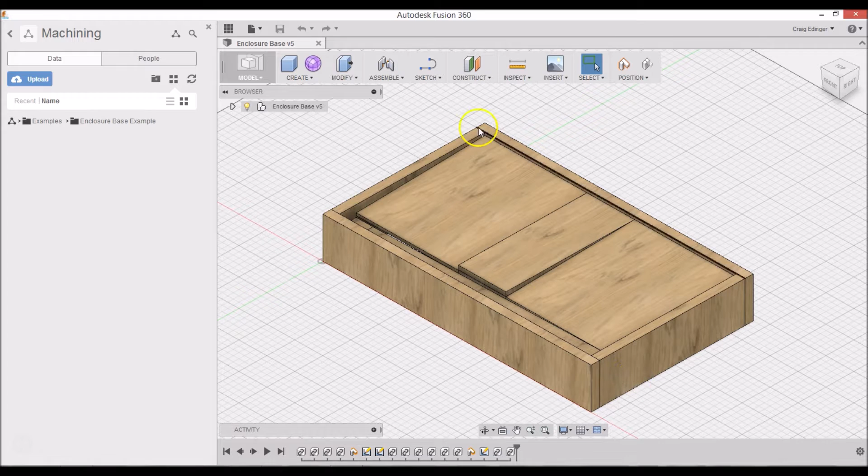Hi, in this video I'll be covering the design of my mini mill enclosure, the base portion of it. It's going to be set up for flood coolant, so that's why these are sloped here, and there's going to be a drain right here. The basic construction is 2 by 8, with a couple of 2 by 6s holding this up, with plywood here.

Once the framing is all done, I will be covering the top with fiberglass. Okay, so the first thing I'm going to do is create a new design, and save it. I'm going to call this base, enter.

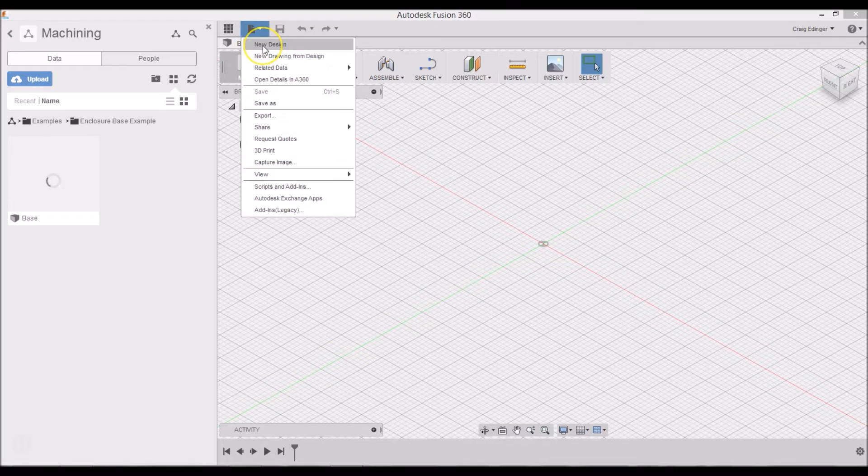And then I'm going to create a new design and save this as 2 by 8 by 48. Hit enter.

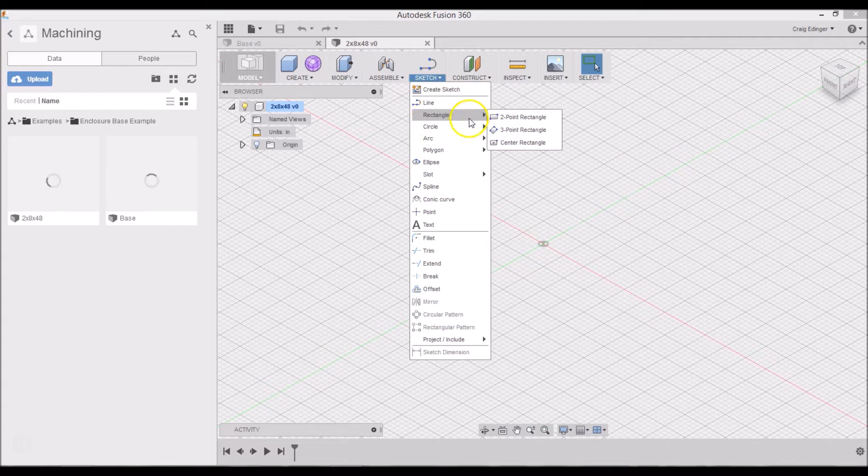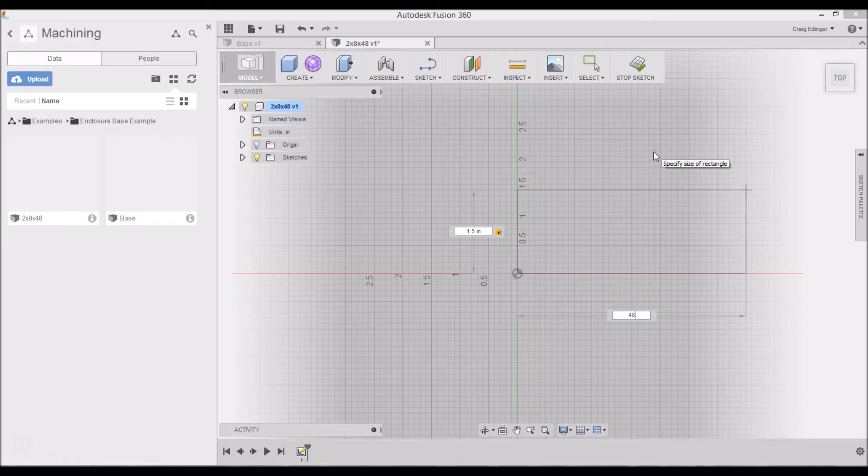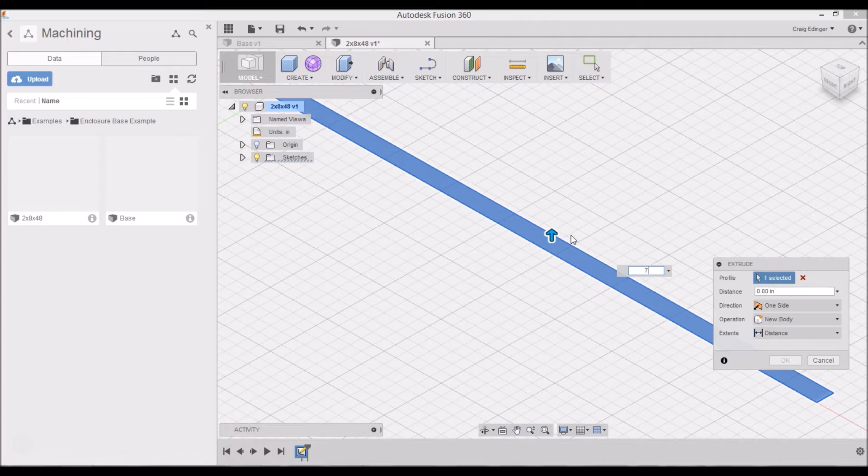Then I'm going to go to Sketch, Rectangle, 2-point rectangle. I'll go to the top, select that plane, and select the zeros. I'm going to make this 1.5 inches, tab, and say 48. Enter, enter. Then go to the home position, right click, press pull, select here, and 2 by 8 is actually 1.5 by 7.5, so I'll put in 7.5 and hit enter, then zoom out.

And then I will go to Modify, Physical Material, bring this out. I'll go down to Wood, and take the regular wood and just drag it onto here. And then close this up. Actually, I'll right click and cancel.

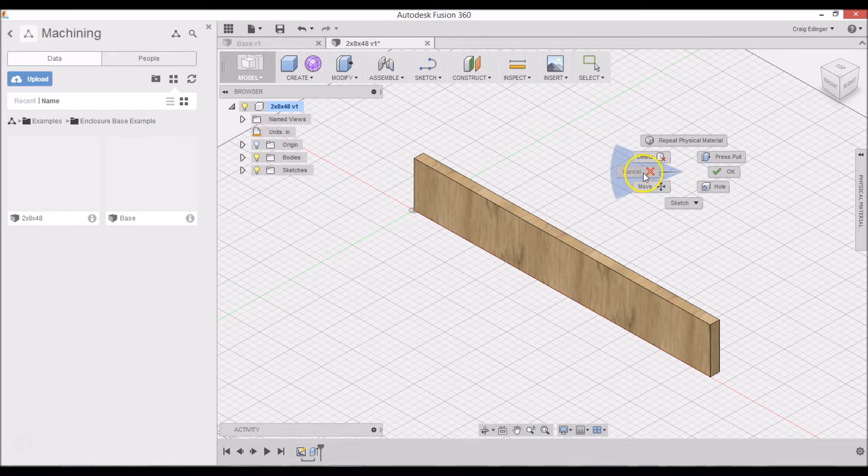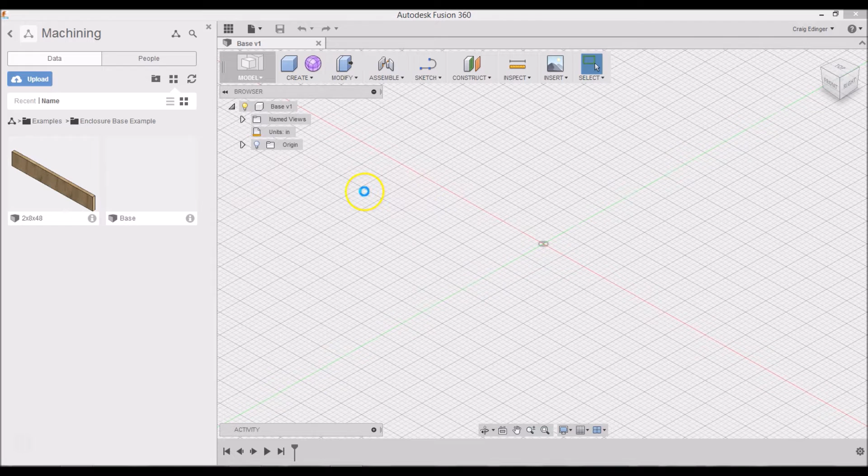Okay, well, that's the first piece. I will save this. And I will then close this. And I will drag that in here. And it's in the right location, so I'll hit enter. Okay, so I now have the first piece there.

And the next thing I'm going to do is make the piece of wood that goes across this way. So I will create a new file, new design, and save this as 2 by 8 by 26. Hit enter.

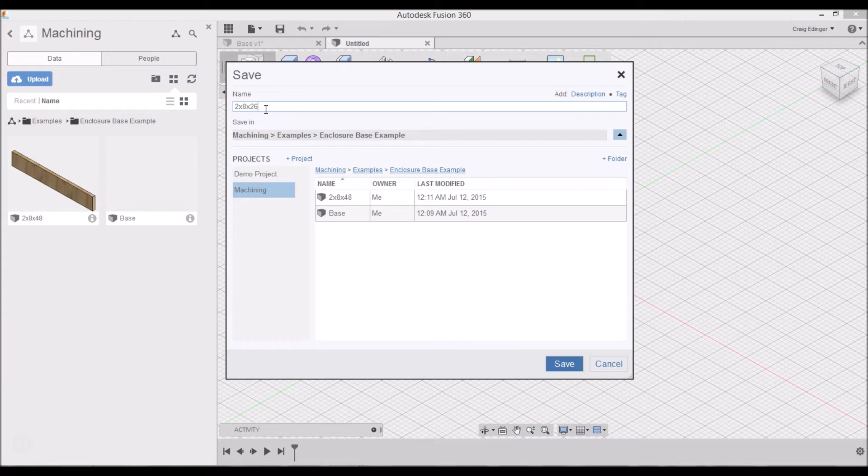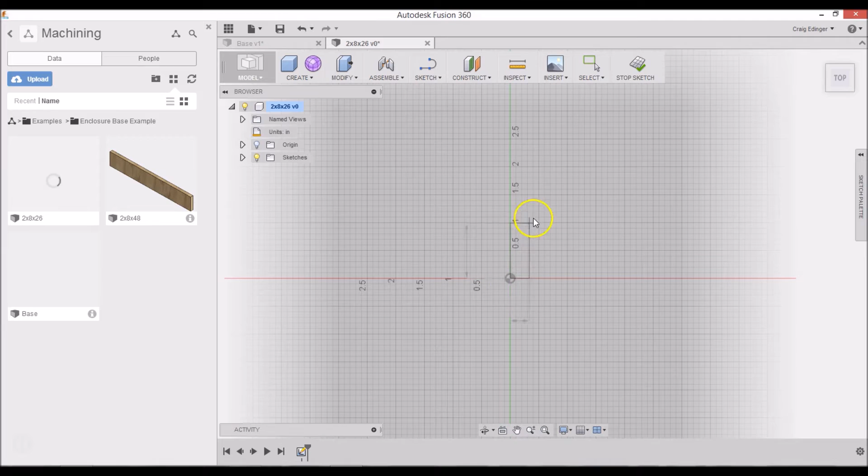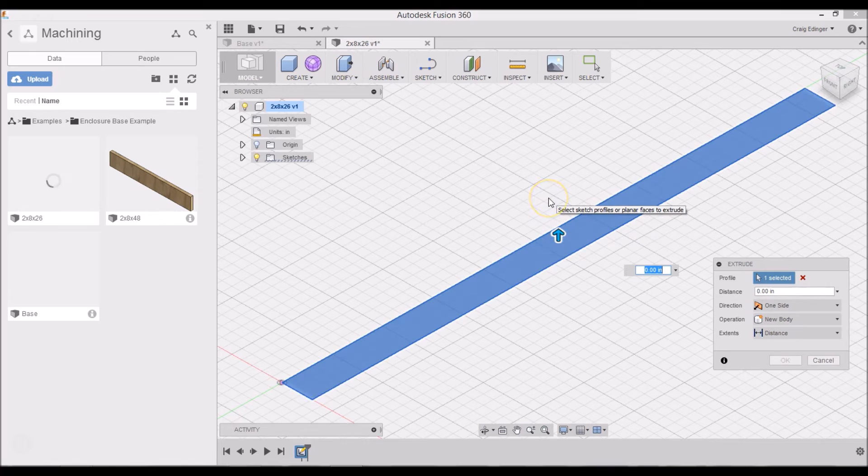And I will draw this in the orientation that it's going to go in, so I don't have to worry about rotating it. So I'll go to Sketch, Rectangle, 2-point. I'll go to Top View, select the plane, and go 1.5, tab, and 26. Enter, enter. Then go to Home View, right click, press pull, select that, and this also will be 7.5, hit enter.

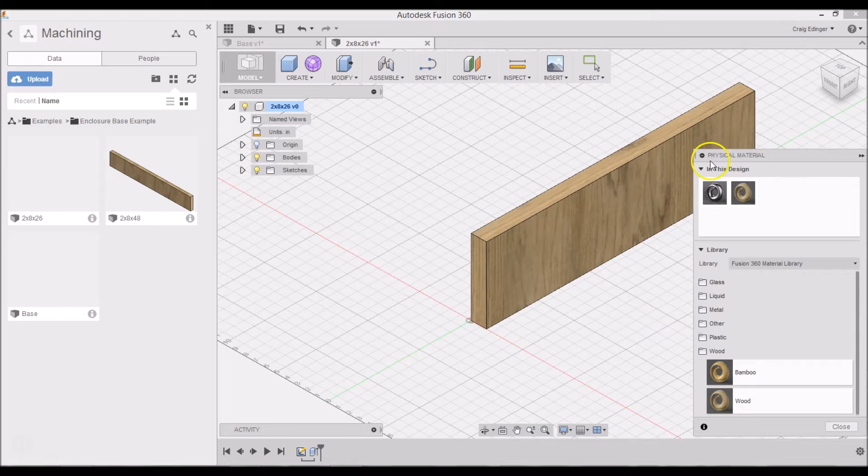Zoom out, again modify, physical material, and then drag wood onto there. And close that up, and File, Save. And I'll go ahead and close that. Wait for that to save.

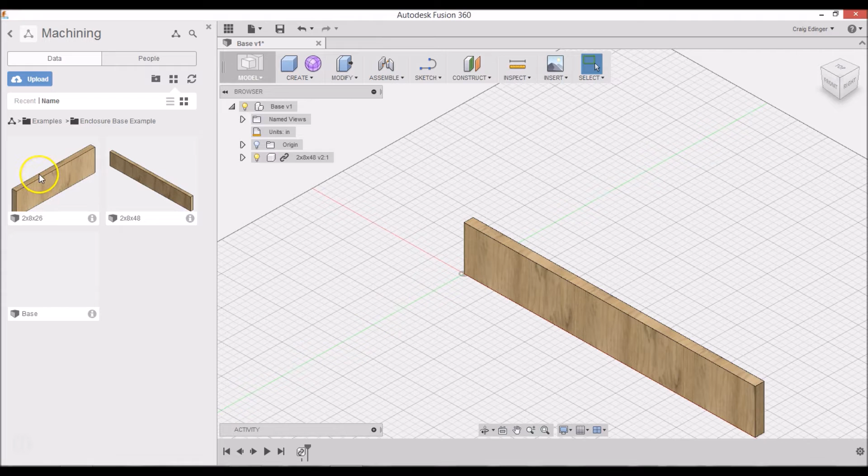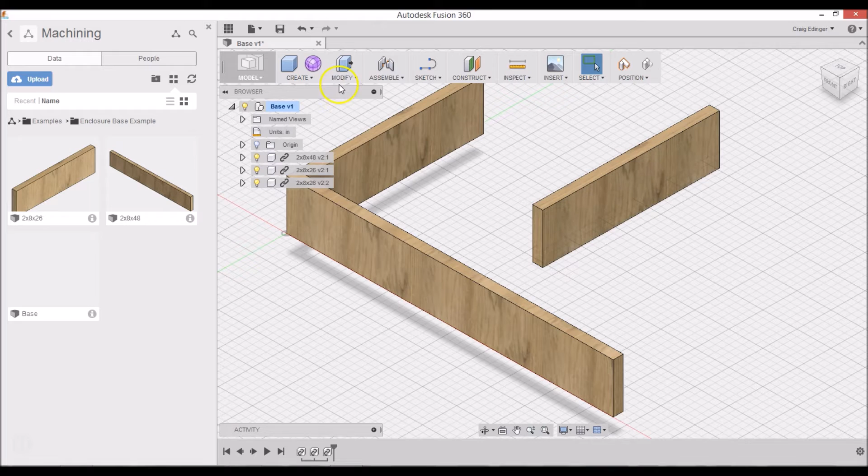I will then take this piece and drag it in, and pull it out a little bit so I can work with it. I will then go to Modify, Align, and select this point and this point, and click OK. And I will pull another one of these in, and pull it out here, hit Enter, and do the same thing, Modify, Align, except this time I'll get this corner and align that with right here, and click OK.

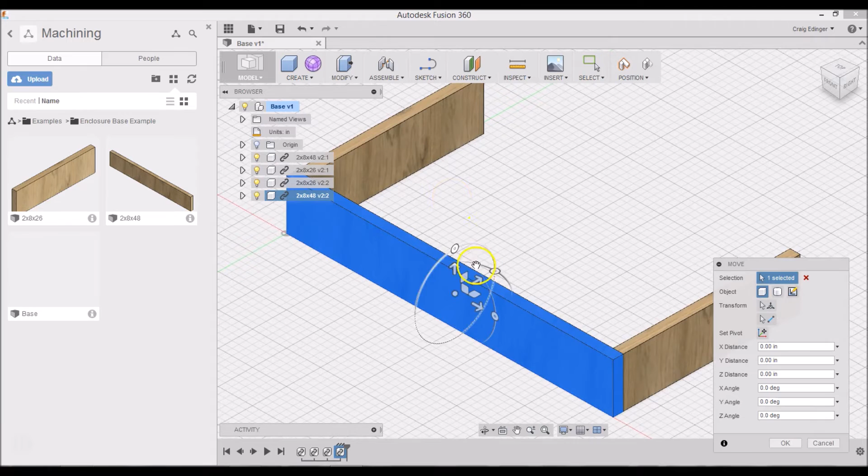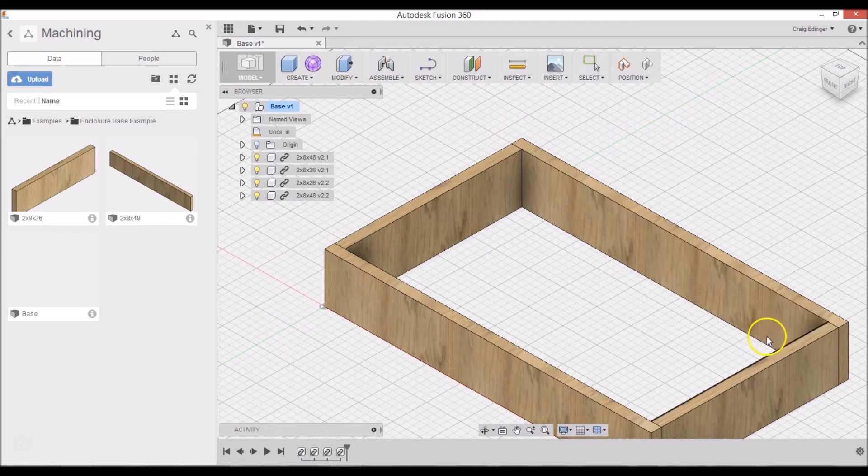And I will bring one more of these 2x8 by 48s in, and pull this out, hit Enter, and then once again go to Modify, Align. This time I'll select here and here, and click OK. Alright, well that's the basic frame done.

Okay, so the next step is to add the two pieces of wood that are going to support the mill. So I'll go to File, New Design, and save this as 2 by 6 by 26. Enter.

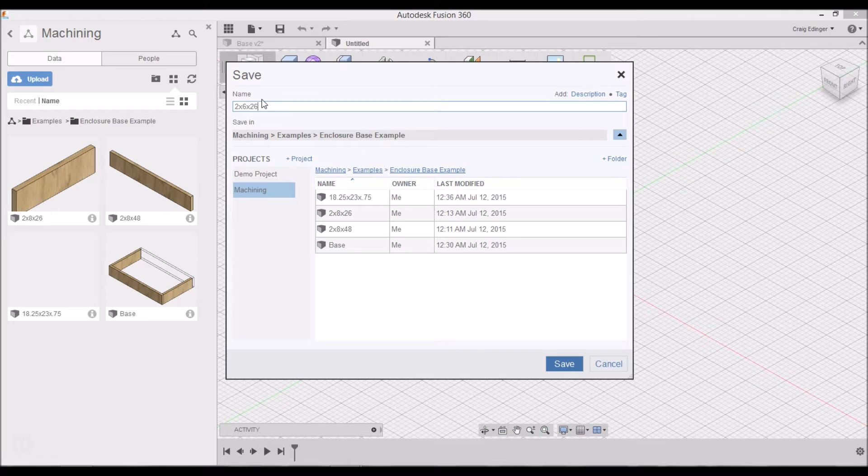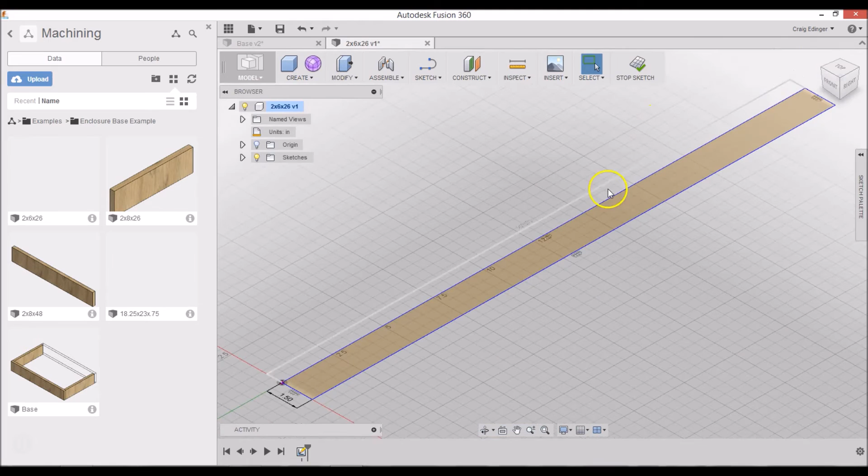I will go to the top view, go to Sketch, Rectangle, 2-point rectangle, select this plane, and go 1.5, tab, then 26, enter, enter. I'll go to Home View, right click, press pull, select this. This is 2 by 6, so it's actually 5.5, so I'm going to enter 5.5, enter, zoom out.

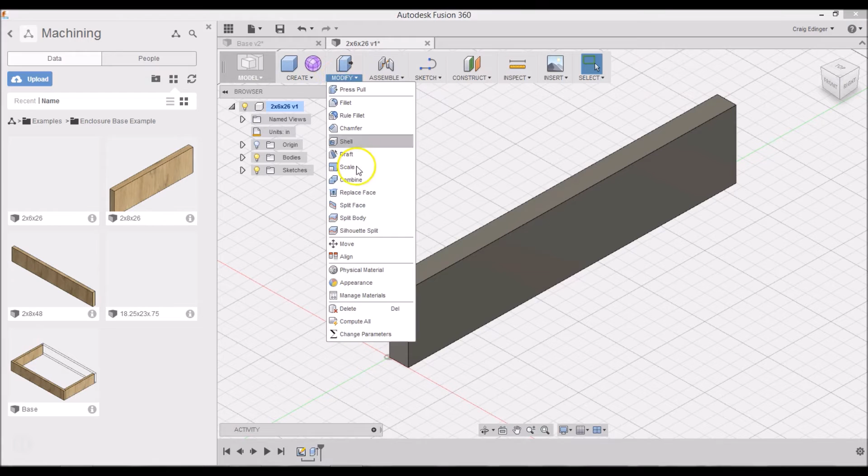And go to Modify, Physical Material, select Wood, and close this, and save. And I'll go ahead and close this.

And while it's saving over here, I have to have this in a certain location. The mounting bolts, the bolt pattern for the mini mill is about 7 inches. So I'm going to make this 8.5 inches. So the easiest way I found to mark that and align these would be to actually mark it on the bottom side here.

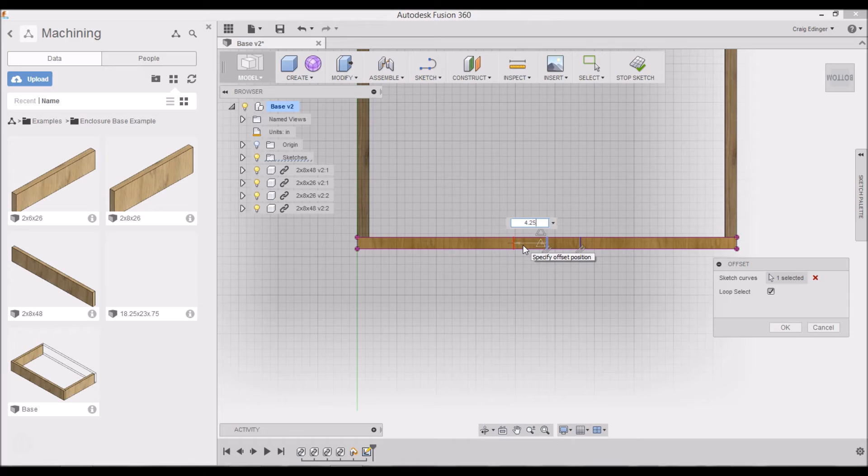So I will go to Sketch, Line, and select the bottom of this piece of wood, then find the center, which is the triangle, go straight down, and then right click, sketch, offset, select that. Half of 8.5 is 4.25, hit enter, right click, repeat offset, select that, do the same, 4.25, hit enter, and then stop sketch, go back to the home view.

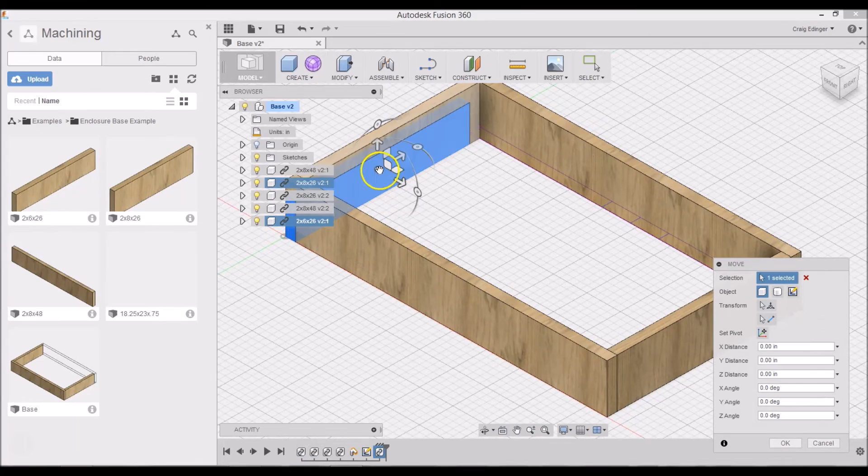Okay, now it's finished saving over here, so I'm just going to drag a couple of these in here, drag one in, and pull this out and down, hit enter, and do the same thing again. Out and down, enter.

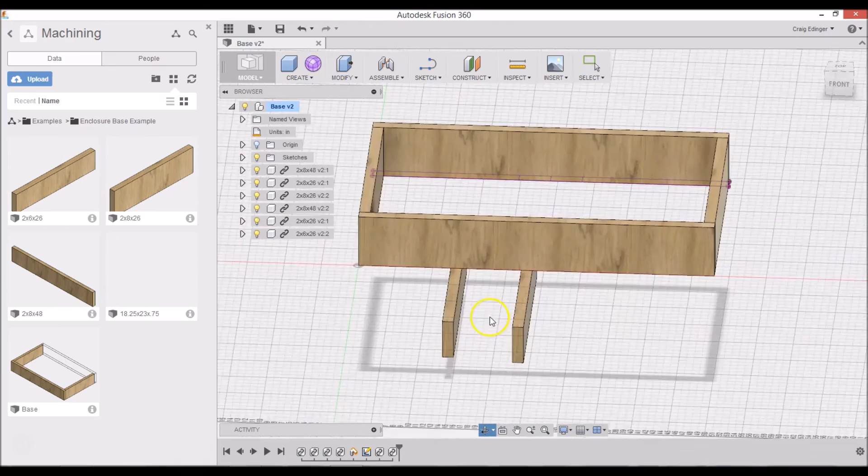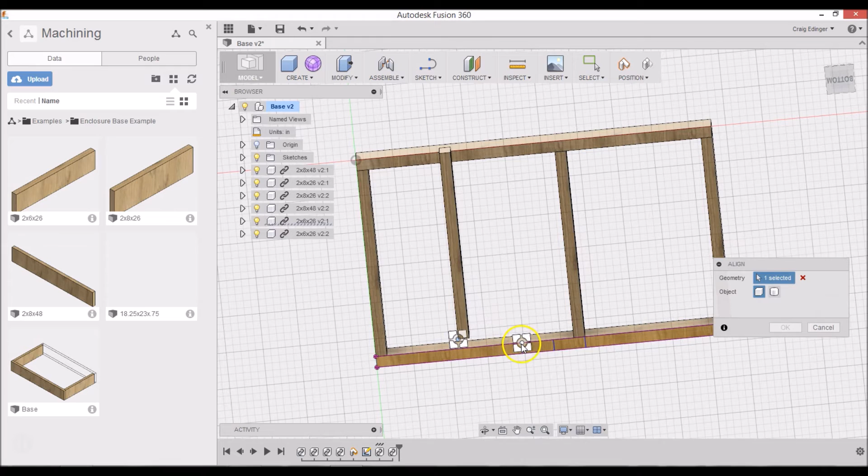Okay, so using the shift and the center scroll, I'm going to go underneath here like this. And go to Modify, Align, and select this point and align it here. Click OK. Right click, repeat align this point with here. Click OK. And go to the home view again. To turn these lines off right here, I can just go over to the sketch here and turn that light off. Zoom out. Okay, and there's the two center supports, right?

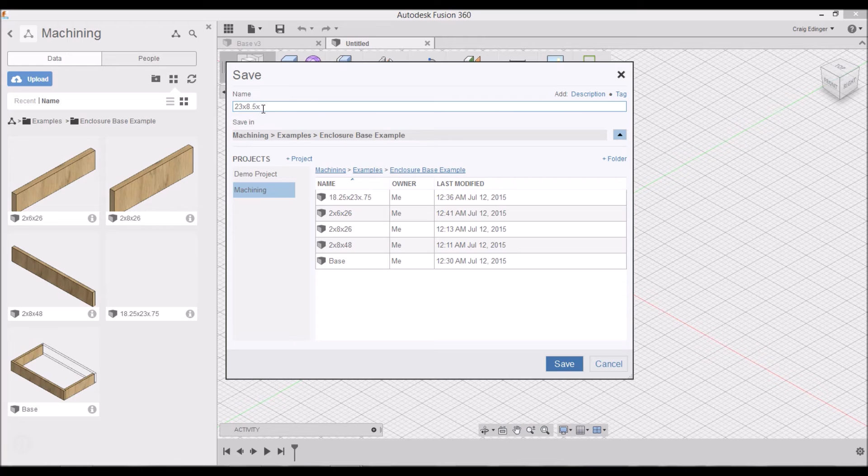Okay, now to make the plywood to put on top of the 2x6s for the mill to go in. So I will go to File, New Design, and call this 23 by 8.5 by 0.75 and hit enter.

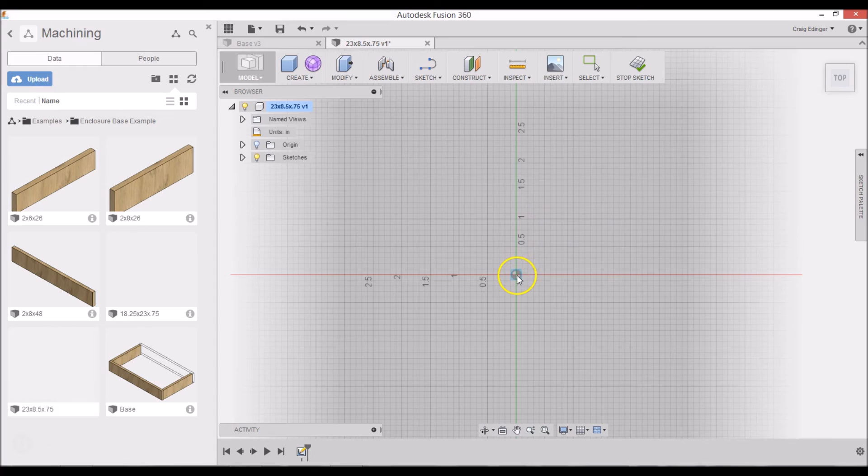And I will go to top view, click sketch, rectangle 2-point, select the plane, and this will be 8.5 tab 20. Oops, I called it wrong. This is actually supposed to be 23 because I'm leaving 23 inches for the front drain.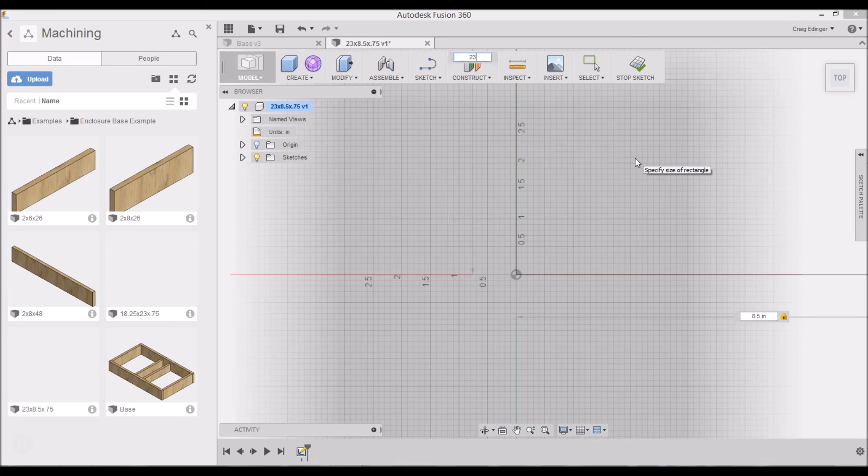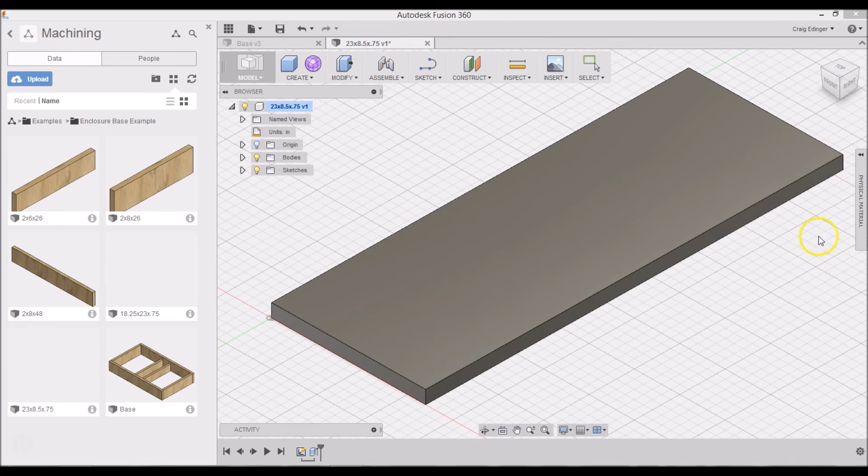So 23, hit enter, enter, top view, right click, press pull, and this is 3/4, so I'm going to go 0.75, hit enter, modify physical material, and go down to wood, drag that in, and file, save, okay.

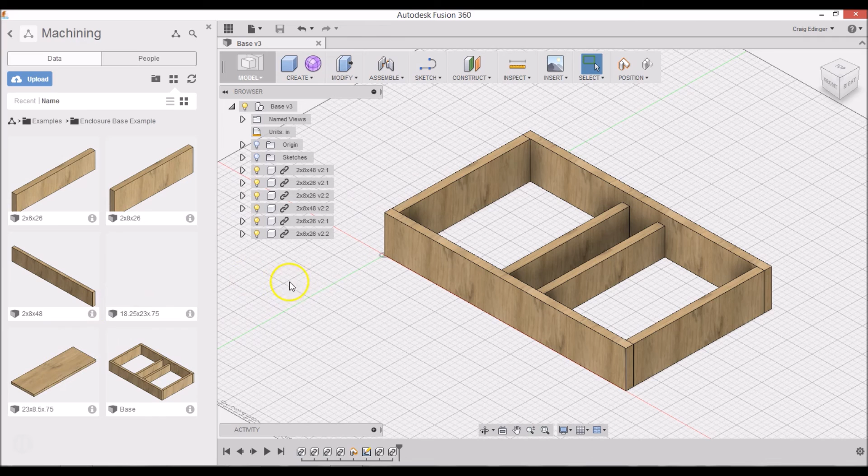And I'll go ahead and close that. Let that save there. All right. Now we'll drag this in up here. Whoops. I will bring this up here like this. And then hit enter. And then one more.

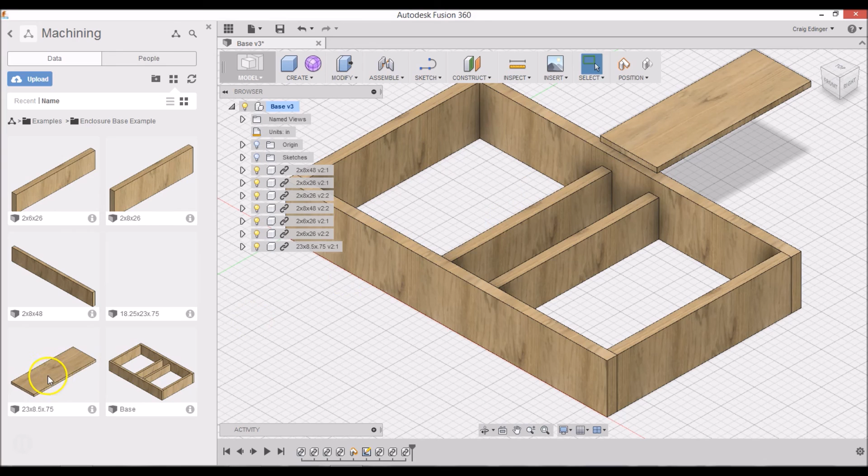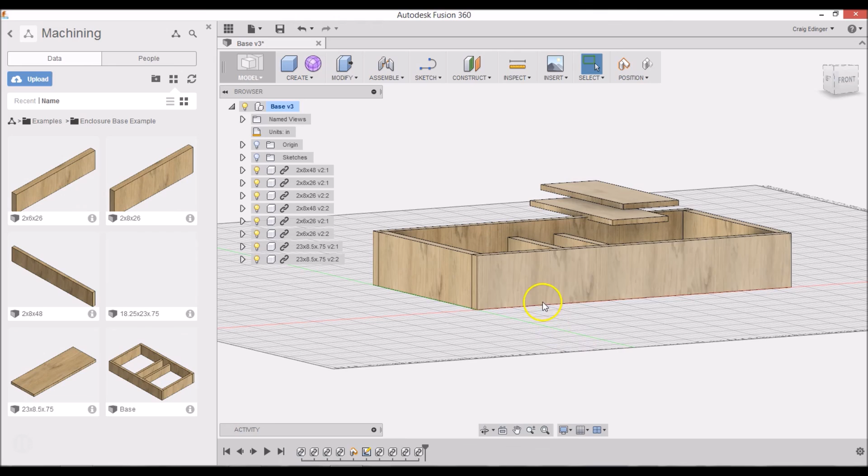Bring this up here above that one. Hit enter. And then I will swing around here. Actually, I could probably pull these back a little bit. Pull this one over here. Pull this one over here. Okay. And swing under here like this.

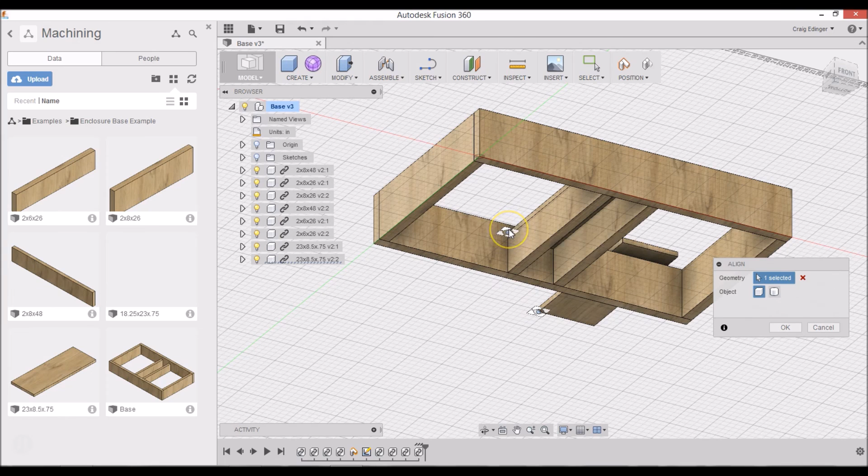And I will go to Modify, Align, and I will select this and right there, and here, and right there. Click OK. Go to Home View. All right, now we have it. All ready for the mill to sit on. All right.